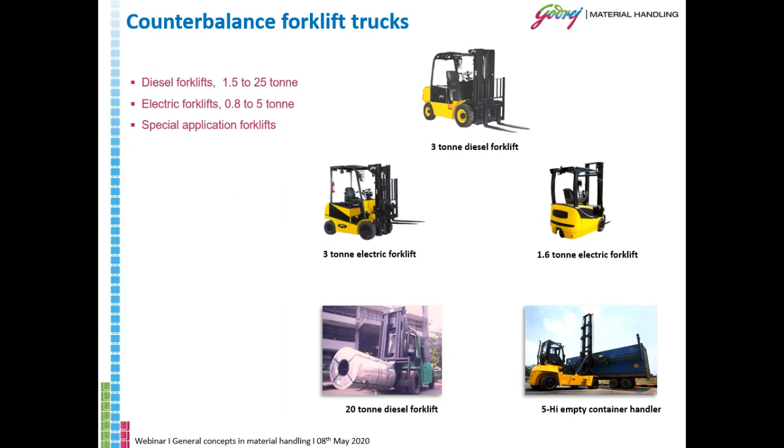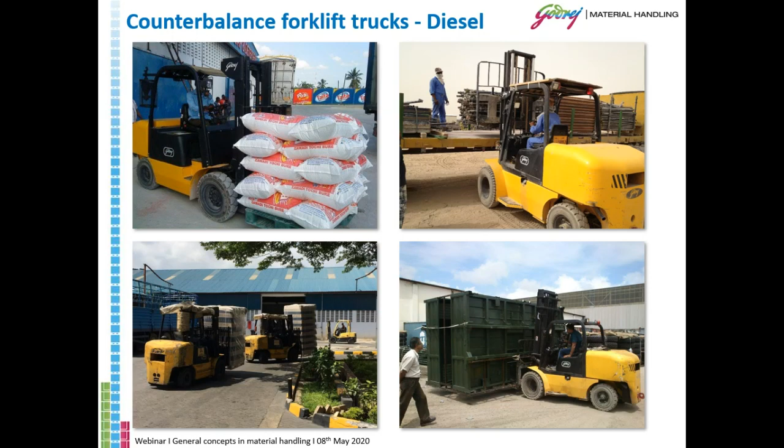So let me just explain in very brief words where exactly a diesel forklift is used. Generally, whenever the application is outside, or it's a bit of a rough environment, it's moving on roads outside the plant, heavy material, rough handling - that is where diesel forklifts are used. So in general, by the nature of the photographs and pictures that you're seeing, you may be able to get an idea of the various applications where this equipment can be put to use.

The next category of equipment is electric forklifts. This is one category which is gaining prominence by the day because there are no emissions in electric forklifts, and it runs with much lesser sound, much quieter. As far as ruggedness is concerned, it is as rugged as a diesel forklift up to a certain tonnage. For example, the general tonnage that an electric forklift can carry is 3 tons, though up to 5 ton electric forklifts are now available in the market.

However, if you need to go higher, for example 8 ton, 10 ton, 12 and 16 ton forklifts, you need to definitely go in for a diesel counterbalance forklift.

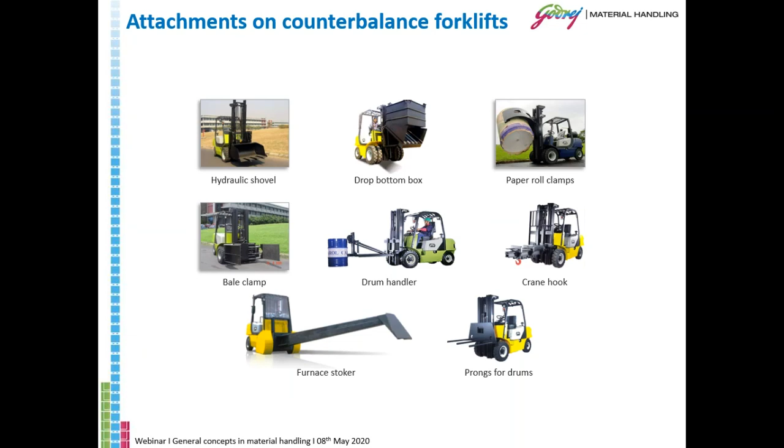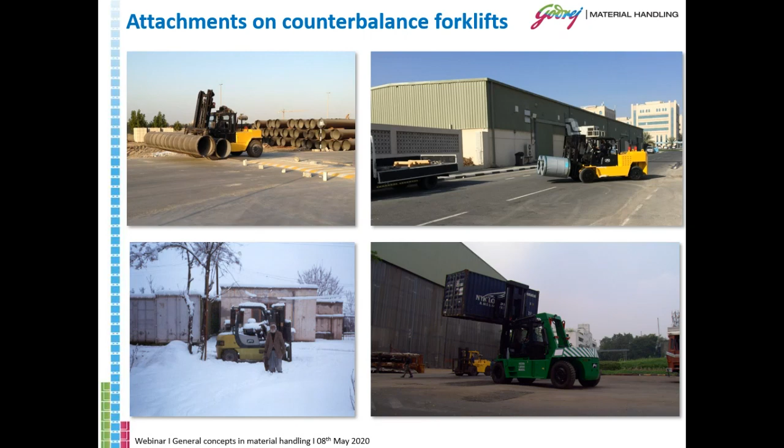I move on to showcase certain attachments in use. As you can see, there are applications such as long pipe handling or empty container handling. Such attachments really help in making the work easy and eliminating the usage of unconventional equipment or unconventional methods. This way you are able to handle your products in a very safe and efficient manner.

Now moving on to warehouse trucks. By the name of it, you can judge that these are basically equipment which are used inside the warehouse or inside the plant.

The main reason for having this category of products is that forklifts, in spite of being a highly rugged equipment, occupy a lot of space and are also constrained by the lift heights that can be accessed using a forklift truck. So to address those two constraints, a separate line of equipment has been developed in the industry, known as warehouse trucks, which ranges right from a very basic manually driven hand pallet truck going up to very high-end man-up machines also.

If you look at the pictures alongside, you will note that we have a hand pallet truck, a powered pallet truck, a stacker, a reach truck, an articulated forklift, a tow truck, and a platform truck.

Just to very quickly explain, a hand pallet truck and powered pallet truck are for ground movement of pallets from one location to another, while the reach truck, stacker, and articulated are for lifting the pallets to a certain height and stacking or destacking from a racking system. To give you an idea, a stacker can go up to say 6.3 meters, a reach truck up to say 12 meters, and an articulated up to say 12.5 meters. So the basic function of this equipment is to maximize the utilization of space in any warehouse.

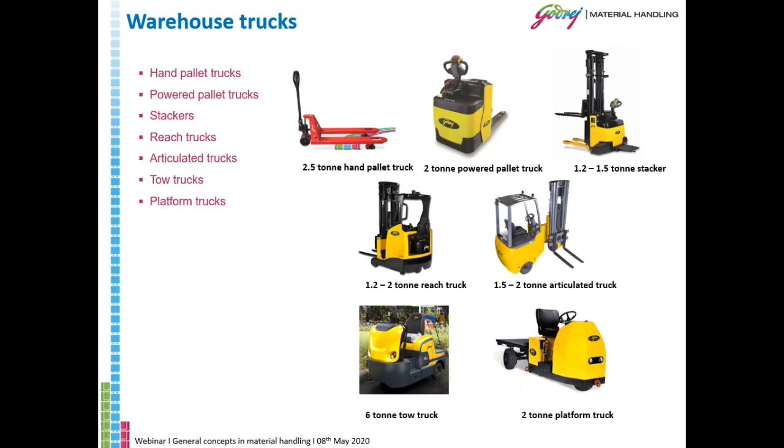As far as tow trucks are concerned, if you would have noticed, especially in an automobile industry, there are a lot of trolleys which are tugged along from one shop to another shop. That is the application where a tow truck comes in very handy. As far as the platform truck is concerned, these are equipment generally used in railway workshops for carrying non-homogeneous material like castings, or for that matter tires or small parts from one point to another. So this, in short, is the category of warehouse trucks.

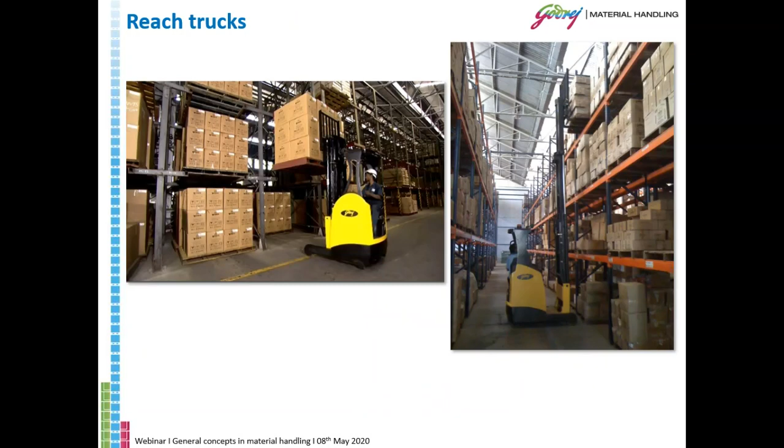Just to show some products in application, this is a reach truck in application in a racking system, and similarly, an articulated forklift being shown in application in a racking system.

Now the next section we are talking about is what are the typical material handling applications in a warehouse. So far what we have covered, I have tried to give you an exposure on the various types of material handling equipment available in the industry. Now what I'm going to talk about is what applications are generally there where this equipment is used, and how you really broadly select that equipment. Though there may be many parameters, if you start using these as thumb rules, at least there will be a good beginning as far as selection of material handling equipment is concerned.

This is a typical layout of a warehouse, where we have tried to show the various applications that are likely to happen in any typical warehouse or storage area.

You have applications like dock operations and transportation. Dock operations means you have a container docked near your inwards gate, which you either empty or stuff depending on incoming or outgoing material. Then there is the staging area, where you de-stuff the container and park it till it's taken to the final storage location. For that you need transportation equipment, and also for taking pallets from the staging area to the racking area.

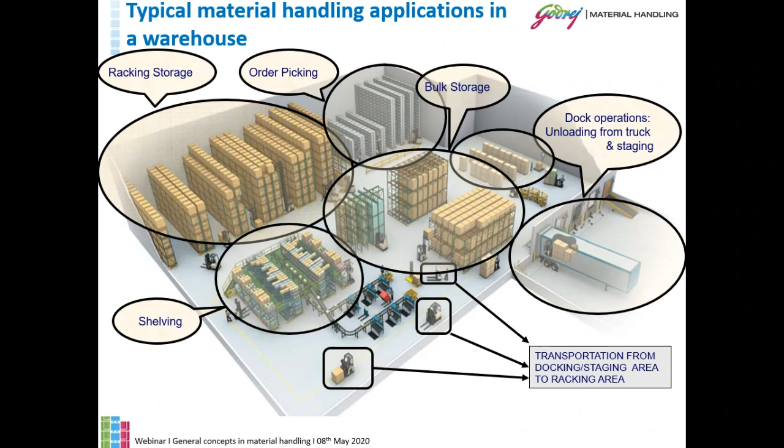Then there is bulk storage, where you either keep items in a staging area, or the items are self-stacking, stacked one over the other. That's how you maximize the utilization of your space without investing in a racking system, because these are self-stackable. That is the next type of storage.

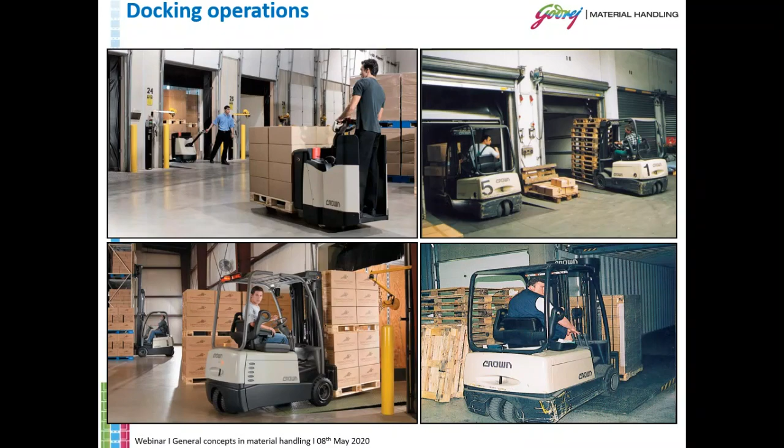Now let us talk about the dock operations first. These pictures typically show the docking operations. On the top left corner, there is a container parked and a person using a powered pallet truck to de-stuff a container, while another person is bringing a powered pallet truck near the container to stuff it. Similarly, forklifts are also used for the same application of container stuffing and de-stuffing. So whenever you have an application that needs docking operations, these are the equipment you can consider.

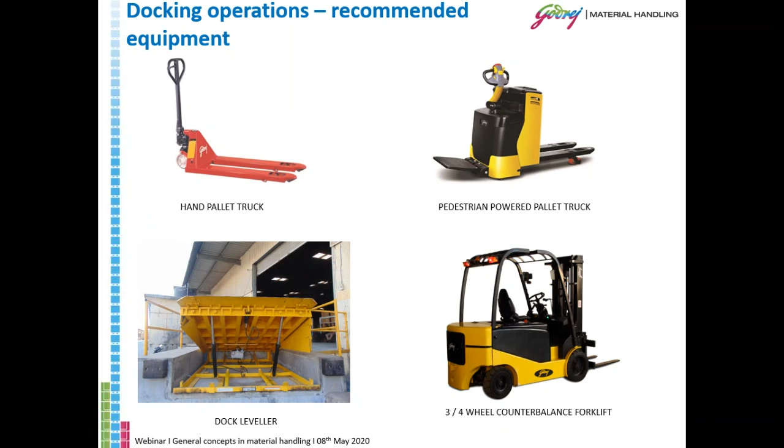I have showcased 4 products: the hand pallet truck, powered pallet truck, and the dock leveler. This is a very important element of any docking operation, because it bridges the gap between the ramp and the truck body, so that a forklift or powered pallet truck can safely and seamlessly transfer material between the truck and the warehouse or the plant, whatever the case may be.

Next, we are talking about the transportation of items from the docking or staging area to the racking area. So when we talk about docking operations, it is not only about keeping the products out from the container, but also storing it in the staging area.

In transportation, because you have to clear off that area fast depending on the throughput and speed of operation needed, there are different types of equipment used. People try to take 2 pallets at a time, or use BOPTs with long forks where they can handle 2 pallets at a time. Such equipment is used because the basic purpose is to clear the staging area fast, so instead of handling 1 pallet, people use 2 pallets to clear the staging area in half the time.

This slide talks about the various products used in the industry for transportation: powered pallet trucks, double pallet stackers, low level order picker, pedestrian rider stacker, forklift, and tow tractor. Many times there are applications where customers keep a cage trolley ready at the staging area, where all the discrete items are put, and then these trolleys are towed away to the final location using a tow truck.

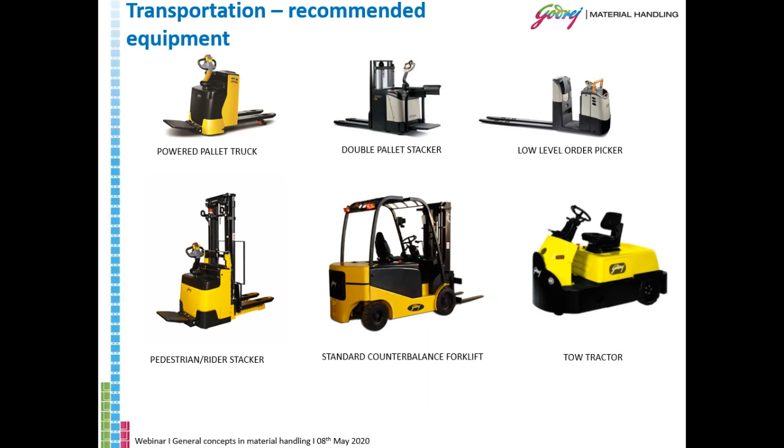So next, as I go into each of these products, there will be some finer points I'll talk about, which may be an existing doubt for many participants of this webinar. One aspect people may not be clear about: can we use a powered pallet truck for closed pallet handling? The answer is yes.

But the main point is you have to be careful about the dimensions, as I've shown here. The plank thickness and the distance between the two runners are very important to know whether a BOPT will be able to handle that closed pallet or not. The wheels have to not only cross the plank, but when we raise the forks and the wheels come down, they should not rest on another runner, which may break the pallet. So we need to be vigilant about the various dimensions.

So if you have closed pallets in your facility and you are intending to use the BOPT, I would recommend that these aspects are considered before putting the truck into operation.

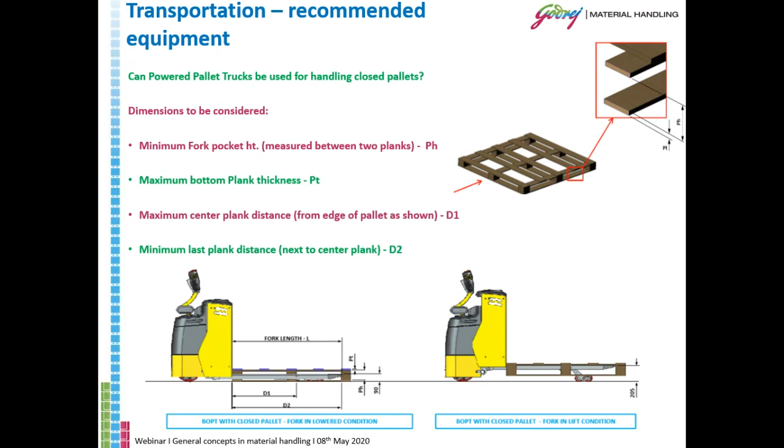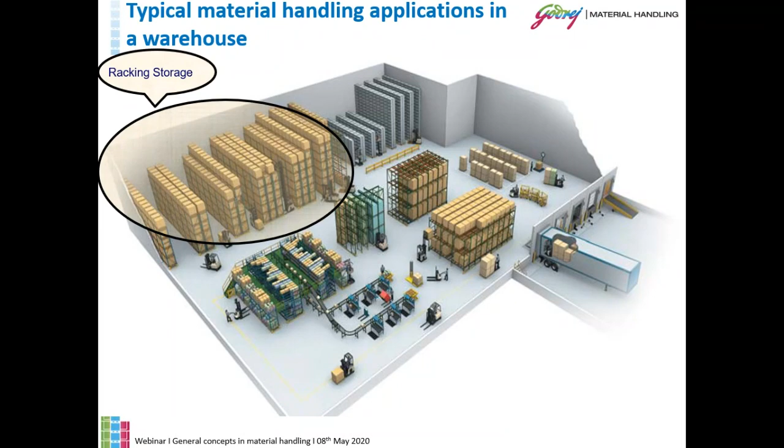Now we will talk about the next part, which is racking storage. In racking storage, there are multiple types of equipment used, and there are many finer points we need to be careful about. I'd like to spend some time on this because it's the most common aspect in material handling and storage.

First, let me show you the various types of racking storage. The first is single deep racking, also known as selective pallet racking system. Here we need to take care of the working aisle space and the loading level required. There are many parameters to consider before designing a racking system or ensuring compatibility between the MHE and the racking system.

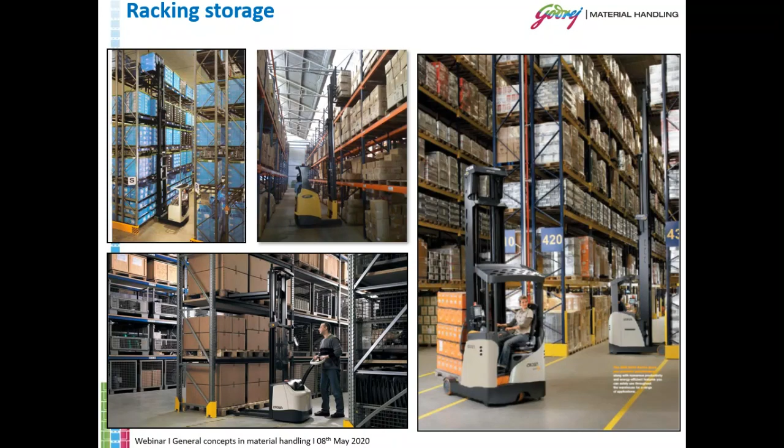Too tight an aisle may slow down the operation; too wide an aisle may waste your space. So there has to be an ideal mix that gives the most optimum solution. This is just a thumb rule we can consider in the industry.

Racking storages and compatible equipment are also defined based on the aisles in which they operate. Starting from below, a counterbalance forklift takes about 3.5 meters or more as aisle space.

If we go to the next step, narrow aisle trucks, such as reach trucks, operate in 2.7 to 3 meters. Then there are other pedestrian equipment such as stackers, which also operate in narrow aisles of 2.4 to 2.8 meters.

And last but not least, we have very narrow aisle man-up machines, such as turret stock pickers and articulated forklifts, which can work in aisles as narrow as 1.5 to 2 meters.

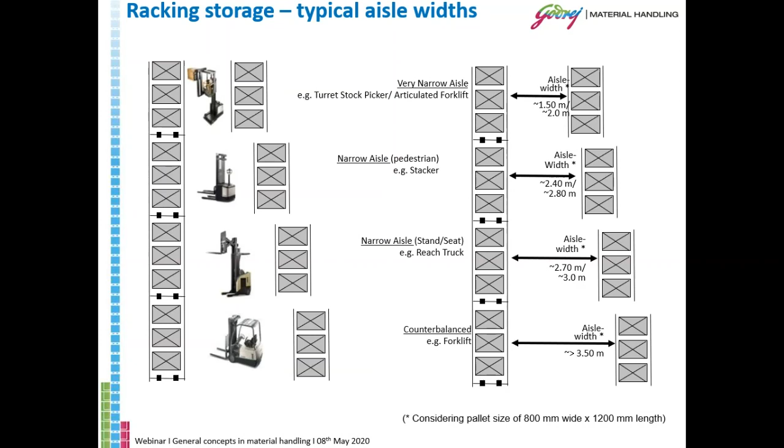But every application has a uniqueness associated with it, so there is no one size that fits all. We have to be very careful in making a selection. In some cases a very narrow aisle solution may work, but in others a reach truck may be the right solution. This is just to give a thumb rule for how different aisle spaces and related equipment are selected.

Taking this further, if we assume a standard racking, layout, and elevation on a particular floor plan, and suppose base level storage with a counterbalance stacker or truck is about 4,500 pallets, then taking that as a base, a reach truck will store about 8,000 pallets, which is almost 70-75% more. And if we take a man-up machine, considering a lift height of up to say 17 meters, it can go up to 15,000 pallets. So that's the storage capacity you can arrive at depending on the combination of equipment and racking you choose.

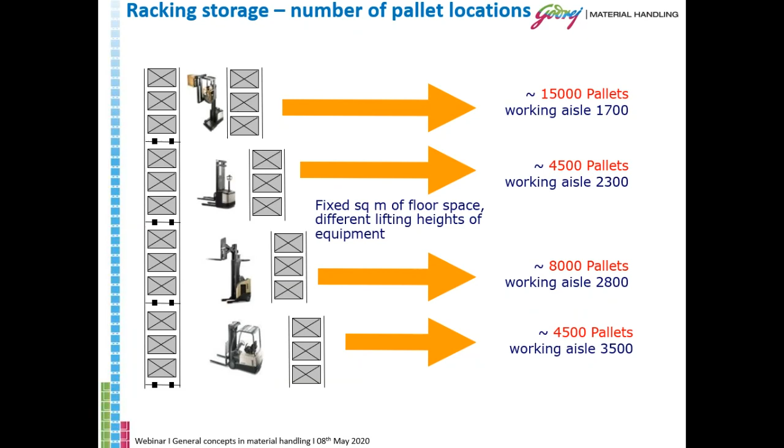Now, in racking storage, there are various types of equipment. As I said, it totally depends on application, and a very important part of that is what is the load that we are carrying, and what are the dimensions of the pallet on which that load is placed?

Because it is all a function of how the load is being handled with what load center. It is simple physics, simple mechanics, whereby it will either be balanced by a counterbalance, or if you look at warehouse trucks, it will be balanced by the footprint of the equipment. So if we have too wide or too long a pallet, we may have to select a suitable equipment, even if it isn't going very high, just to handle that wider configuration because the load center would have shifted.

These are things we have to be very careful about before we look at a catalog and just say, okay, I need a 1.5 ton or 2 ton forklift because my pallet is just 2 ton. We cannot look at the load in isolation. We also have to look at the size which is going to be handled. That's a very important criteria for selecting equipment.

So these are the various equipment visible in front of you: stacker, reach truck, single deep and double deep reach truck, articulated forklift, man-up machine, and a stand-up counterbalance forklift is also available in the industry for people to use.

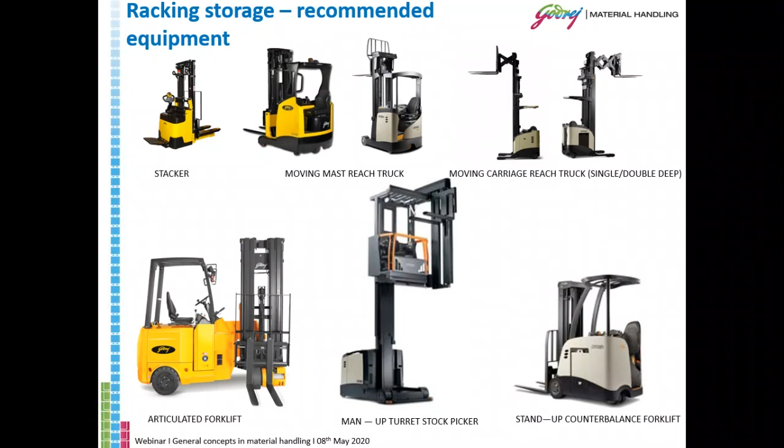Though people also use telescopic forks on moving mast reach trucks, that is an attachment and not an integral part of the equipment, like it is in a double deep reach truck, where the double pantograph is an integral part of the equipment.

So these are the various parameters that we need to be vigilant about before we select the right material handling equipment.

For example, as I mentioned, the type of pallet. When I say type of pallet, it is also a function of whether it is an open type pallet or closed type pallet, and it is more relevant for stackers, as you will see in subsequent slides.

Next is aisle space. What is the available aisle space that I have, or depending on the equipment that has been selected, a suitable aisle space has to be kept.

Because it is important—if we keep too tight an aisle space in the interest of storing more, somewhere or the other we will be compromising the throughput, because the trucks will run slower, or there can be instances of unsafe operations, where trucks may brush against the racking system and it may lead to an incident.

Next is maximum fork height. Again, depending on what your last loading level is, we typically add 200 mm to that to arrive at the most optimum maximum fork height, and then we select whatever is in the range.

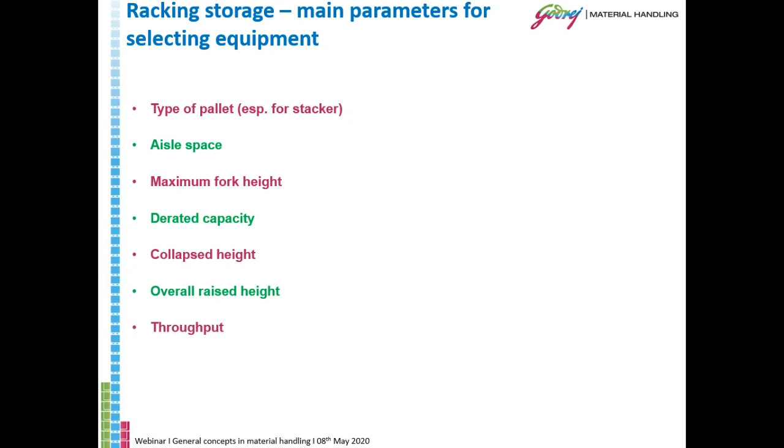But you will go back and see how many pallets do I need to take in, take out, and whether with a pedestrian equipment, where a person is actually walking behind the truck or standing on the platform and moving, I'll be getting the throughput, or I should rather go in for one reach truck rather than 4 stackers. Suddenly the techno-commercial reasoning will change when throughput comes into picture. So that is what I intended to mention, that every parameter is important and nothing can be seen in isolation.

So this is a typical layout. Don't worry if the numbers are not visible, I just wanted to showcase. I hope the cursor is visible to all. So this is the top view of a racking layout. The space in between is the aisle space that I was talking about. This is the space where the equipment will be predominantly working, so we should have enough space for the equipment to operate.

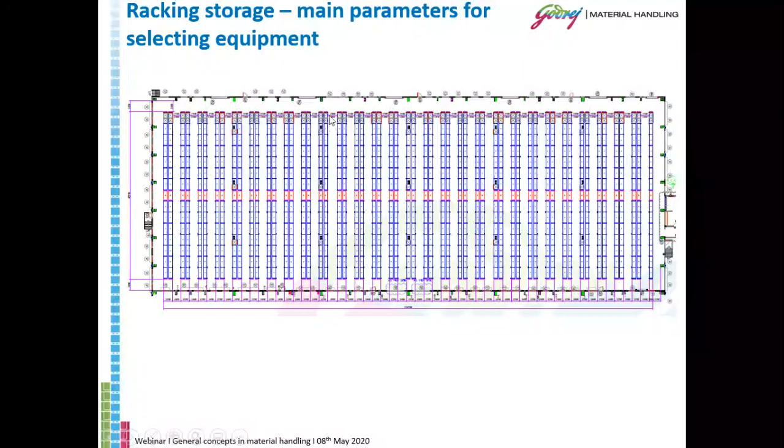Now next, if we look at the other aspects of selecting an equipment, so as we said that one of the popular equipment is stacker. So 2 stackers, I hope they are visible to all. Left hand side is the fork over stacker and the right hand side is the wide straddle stacker.

Now here comes the important part. The left hand stacker cannot be used for a closed type pallet. Okay, so it has happened so many times in the industry that we have come across situations where people were not aware of this aspect, leading to a wrong decision and leading to some sort of hardships in terms of exchanging of equipment or slowdown in operations or operations getting hampered because of this. So this is an important parameter that we need to look at.

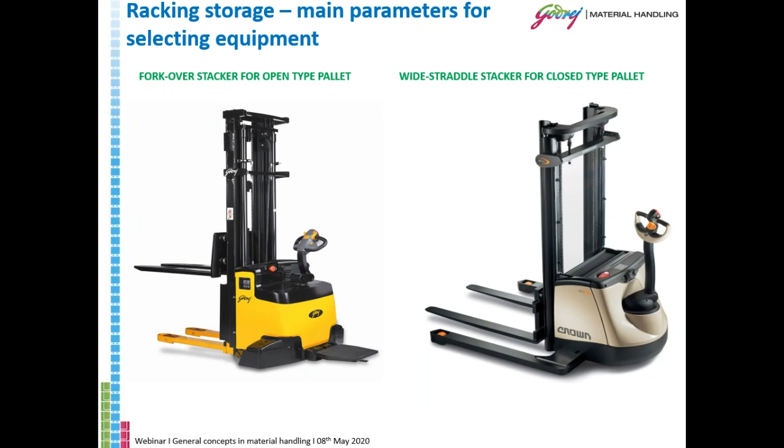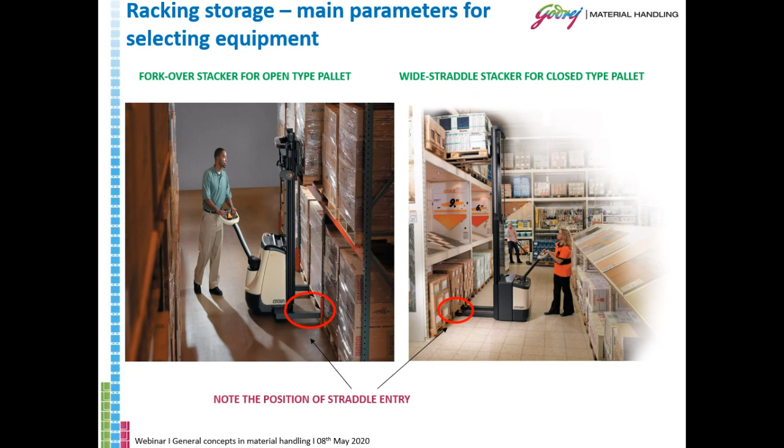So if you notice in this image, on the fork over stacker, the straddles are going inside the pallet while the forks are up keeping the pallet. I'm talking about the left hand side. Okay, whereas on the right hand side it's a wide straddle which is going alongside the pallet. So you can notice the position of the straddle in both these cases.

Now if you notice, if we take a closed pallet for a fork over stacker, this is what is likely to happen. It will not go, and you cannot perform that application with a fork over stacker if your application has closed pallets.

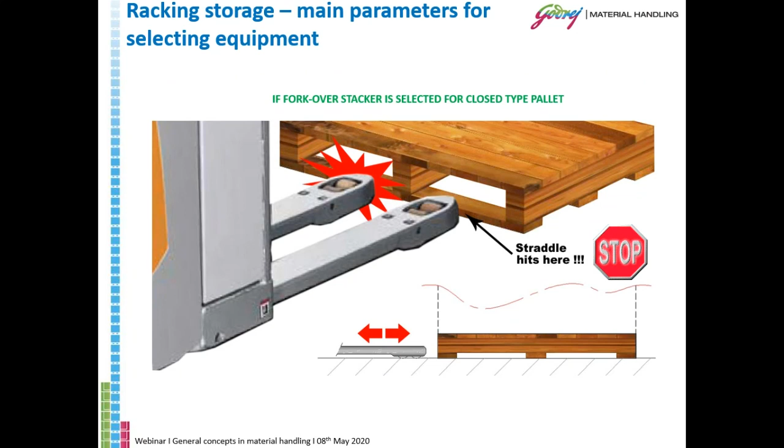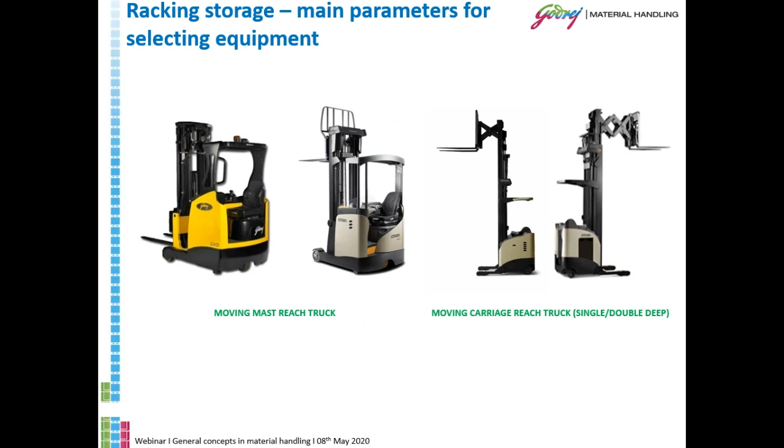Now, next we talk about reach trucks. Again, in reach trucks, as I explained, there is a moving mast reach truck and then there is a moving carriage reach truck, which is used for single or double deep application. Okay. Now, I would just highlight certain critical points which are important in selecting or keeping in mind when a reach truck is being selected for an application.

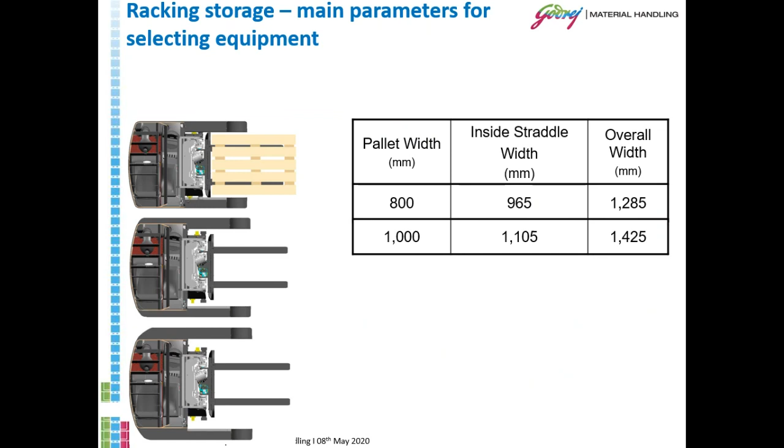The first is there are different straddle dimensions which are available for pallet widths depending on how the truck is configured. Okay, so with different pallet widths, you have different straddle dimensions. But what happens if your pallet width is wider than the straddle width? Now, there's another point that you have to notice. If you notice in the table, the 1200 width pallet, if we use the widest truck, it is having the highest width. Okay, whereas the first truck which is handling a 1200 wide 800 wide pallet, which is having the lowest width.

Now we may take a choice that even though my pallet is 1200 wide, I may still select a 1285 width reach truck. Okay, why? Because if you want to have an aisle space where you want two reach trucks to cross each other while they are moving from one point to another, a 1575 may make it a bit of a struggle, or you may want to keep a very wide aisle space for that. Okay, but if you are not able to accommodate the pallet between the straddles, then you need to take care of one more aspect, which is in the next slide.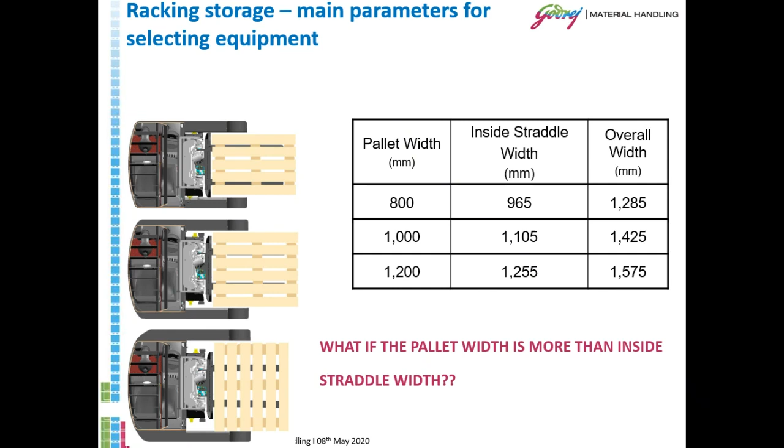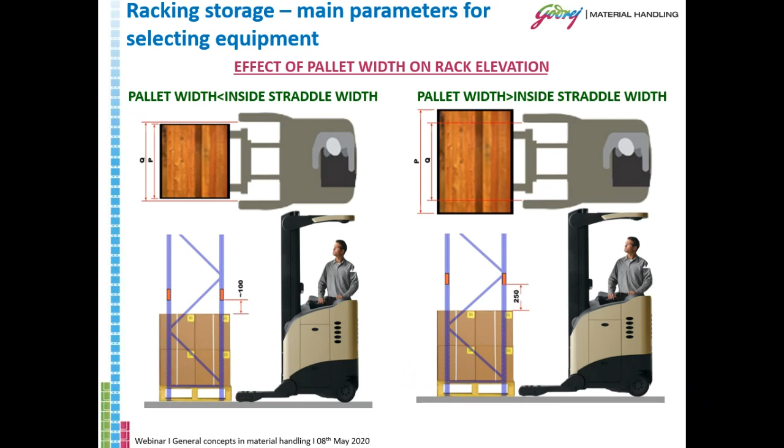Okay, now if you see, your conventional distance between the top of the pallet and the bottom of the beam in any racking system is say 100, which is enough for the pallet to be taken off and taken away. But if the pallet is not getting accommodated between the straddles, that means it is over the outriggers, you need to take care of the height of that outrigger to keep that additional space. Now these numbers are just for representation purpose. They will change based on the equipment in consideration. Okay, but the point that I'm trying to make here is that you need to be vigilant about this part.

Next, we are talking about a double deep racking, which is a very popular way of storage, especially in cold storages where we are trying to maximize cubic space utilization. Here, it is very important that we make the right choices in terms of racking design so that the truck and racking are easily able to work with each other with absolute compatibility.

Now, if you notice in single deep racking, the mast remains outside or the outriggers remain outside the racking system, whereas in double deep racking they move below the bottom beam. Okay, or they move inside the racking system. So what does it mean? That for double deep racking it is recommended that you keep a bottom beam, because if you don't keep a bottom beam, either you may have to have a very wide span or you may not be able to operate the truck in that environment.

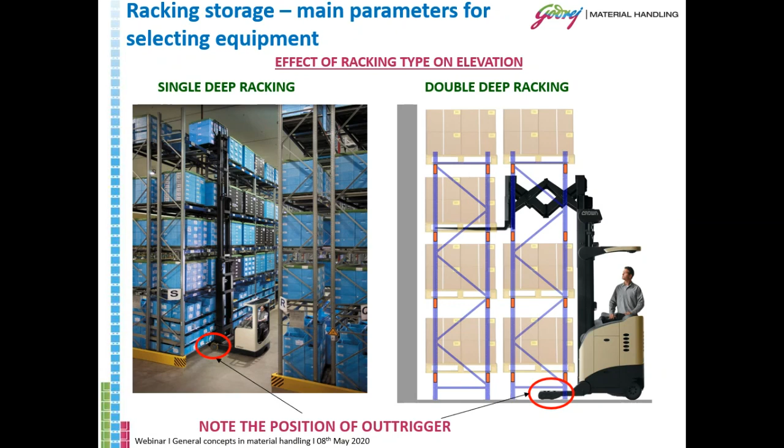Okay. The second important aspect, because the straddles are going inside the racking system in a way, to be able to place the second deep pallet, so your beam span is going to be different. Now this is one of the most important points that many times gets missed out at the planning stage, leading to some issues in terms of operations.

So if, for example, we are keeping two pallets on a level, generally the beam span on which these pallets are placed will be 2700 wide. So how is that calculated? 1200 plus 1200 and 100 space on each side. So that is 2700. Okay.

However, because now we have to accommodate the outrigger, a calculation has to be made which takes care of these outriggers also being required to go inside the racking system. So you may require, instead of 2700 mm, maybe 2850 or 2900 mm. Okay, so that is what we need to be very vigilant about, because if we go with a conventional beam span and go for a double deep reach truck, it may certainly create some issues at the time of implementation.

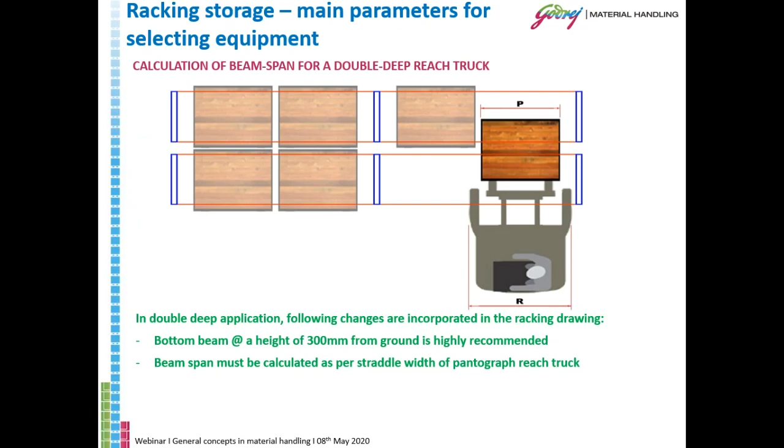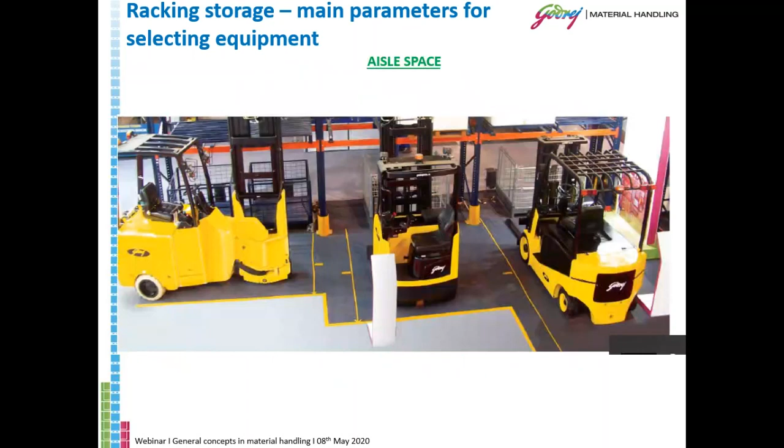As I said, aisle space is a very important consideration. This picture speaks for itself. For example, a counterbalance forklift will require a very wide space, a reach truck will require relatively less space, and as I mentioned in my earlier slide, VNA equipment like an articulated forklift will require much lesser space, the lowest aisle space in the industry. Okay, so if aisle space is one of the considerations and we want to maximize the storage, this is one of the equipment that may be considered.

But one important point here is there is something called end aisle space. End aisle space means the aisle where the aisle is ending. It's a dead end. At that point, not for any other equipment, but for an articulated forklift, you need to keep a minimum space of 750 to 850 mm, so that the last pallets can be placed, because that is how this truck operates in an aisle. The truck is not moving, it is only the mast which is articulating along an axis and keeping the pallet. So for it to articulate around its actual axis, it needs that additional space, which is important to be kept at the end of the aisle.

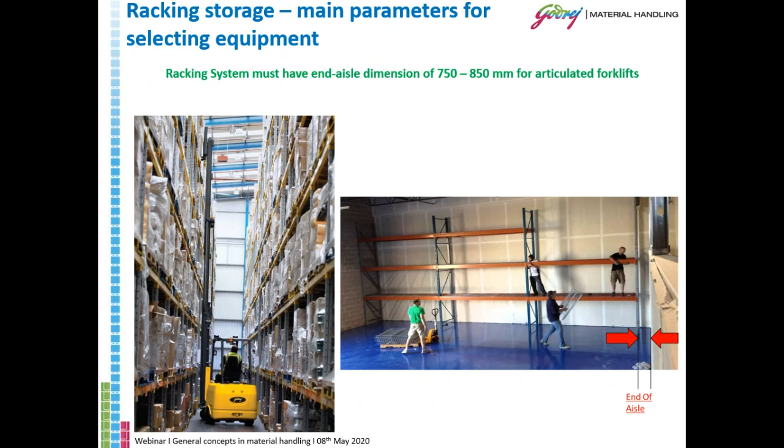Next type of racking system that is popular is the drive-in racking system, where the equipment generally goes inside the racking system to do the stacking and destacking. Now, what is important when

Hello? Am I audible? Hello? Yes, audible. Yeah, you're audible now. Okay. Thank you. So is the screen visible? Sorry. Yeah. So I hope the screen is visible. I just had a connectivity issue. I'm sorry about that.

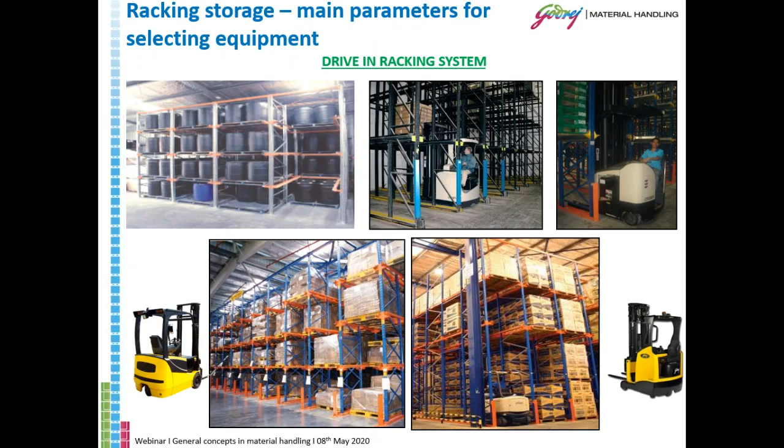So drive-in racking system is another popular racking system, as I mentioned, but the important aspects to be considered in this type of racking system are: the width of the equipment should be able to get accommodated in the system, because the truck is getting inside the drive-in racking system. And second, the first level should be such that it doesn't become an obstruction for the overhead guard height or the structure of the machine. I'll just show it in the next slide.

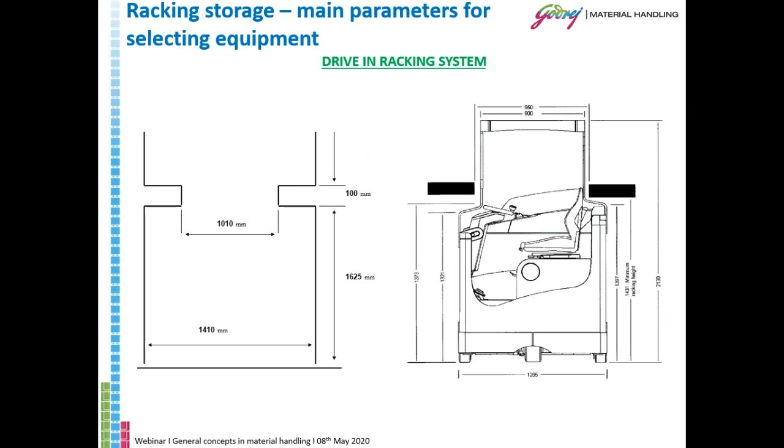So this is a typical elevation of a drive-in racking system on the left-hand side. You have the cantilever on which the pallets are placed, and on the right-hand side is a truck where you see there is a slight modification which has been done on the reach truck, so that it is able to squeeze through the space between the two cantilevers on which the pallets are placed. Okay.

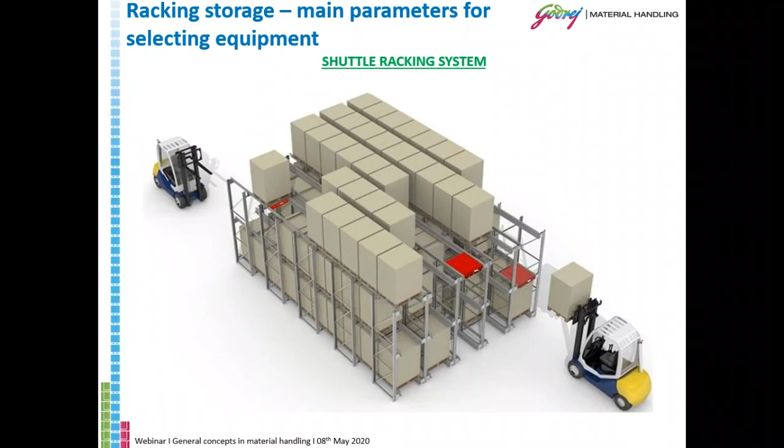So the next racking system which is getting very popular now is the shuttle racking system. Here, instead of the truck going in, it is the shuttle which is taking the pallet inside. Those red colored objects that you're seeing on the screen are the shuttles on which the pallets are placed, and these red colored shuttles are remote control operated, and they run on powered motors on batteries, and they take the pallet and place it behind and come back to pick up the next pallet. Okay, so this is a system which is also getting very popular in dense storage. So a few pictures where you can see the actual image of a radio shuttle.

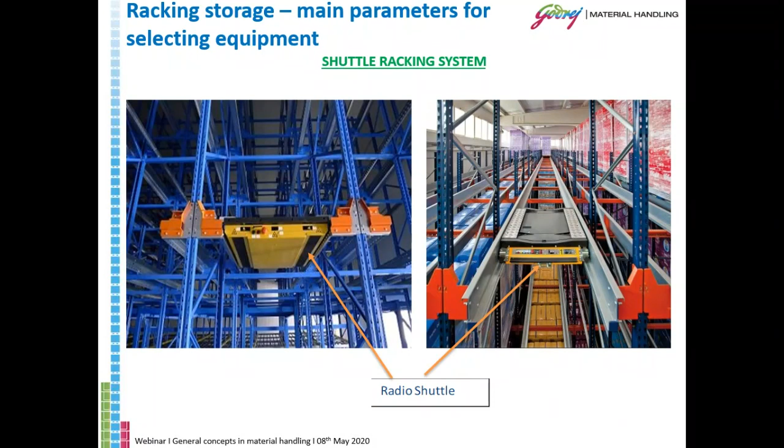Which carries the pallet from the beginning of the row to the end of the row. Now, one of the most important aspects is that because the shuttle is slightly inside and there is also a barrier in front of the racking system, you will not be able to place the pallet exactly till the edge unless you do something called tip loading.

Many times this very small aspect gets missed out, leading to pallets not being able to be placed on the shuttle, and the whole system comes to a standstill till the solution is defined. And the other pitfall is, if we do not define this upfront, there is a change in load center also.

You may have to change the equipment from say 1.6 ton to 2 ton, in case your load capacity requirements at a height of say 7 or 8 meters are not able to be met with the extended load center using a lower tonnage reach truck. So that is the criticality of this particular aspect.

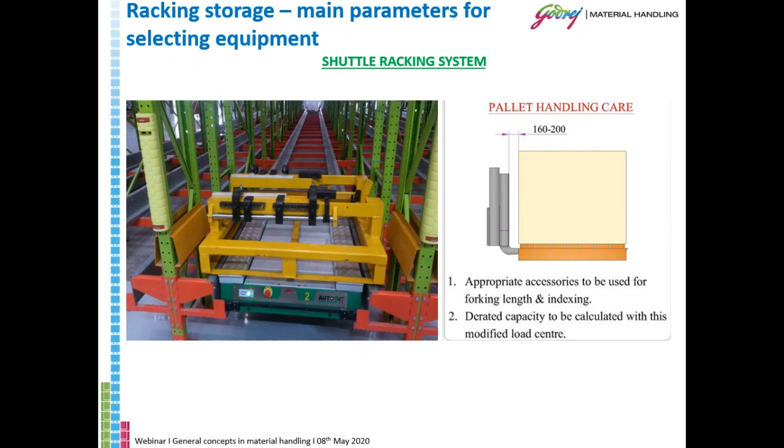As I mentioned in the beginning of the presentation, these are very small, basic things, but we understand many times these get skipped out. That's the reason we are sharing this basic information, which helps you to plan better, be vigilant, and have a safe application.

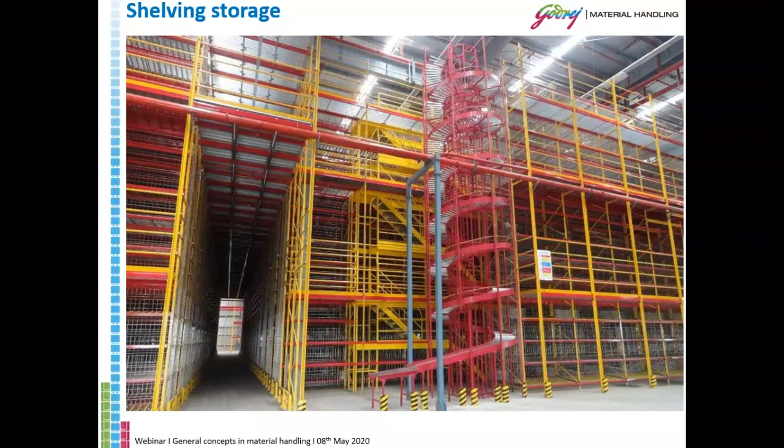So next we are talking about a shelving system. In a shelving system, there is generally no material handling equipment used. But again, you have to be careful that if we are using items like staircases and so on, it should be something mobile with good stability so there are no issues.

One of the products that are used is something called a work assist vehicle, which is just a concept.

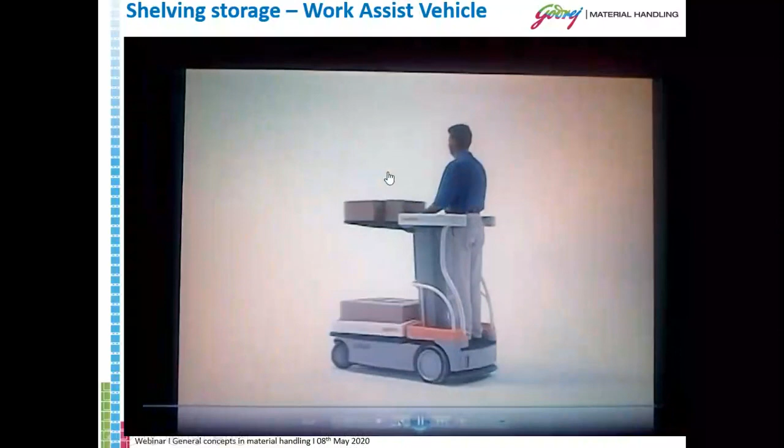So I hope that cleared the concept of safe handling even in shelving systems. Now next we are talking about order picking.

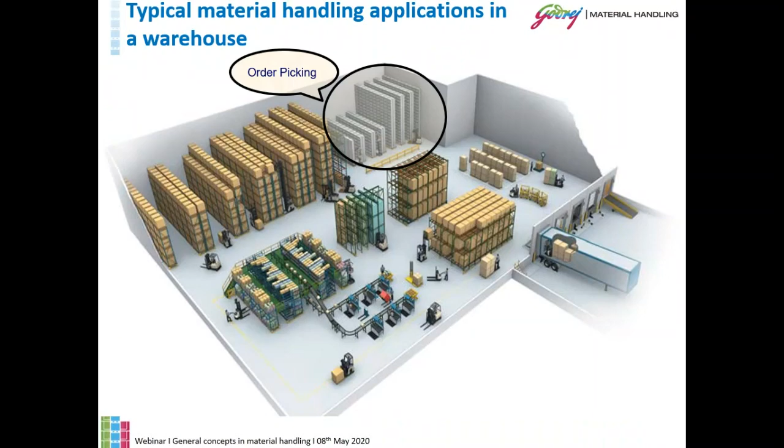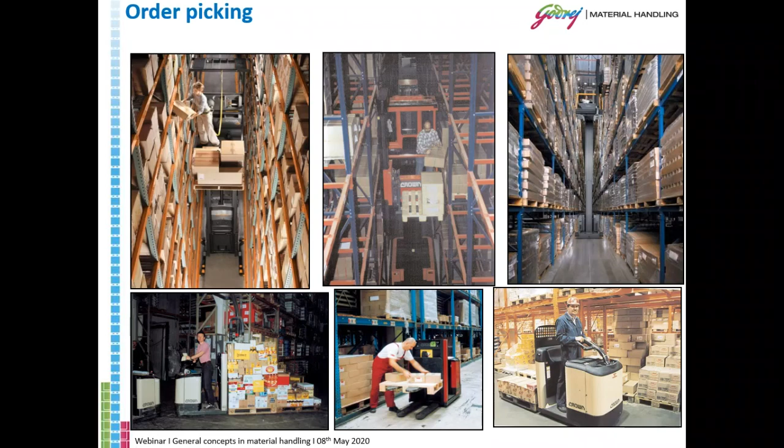This is a very important application where sometimes very basic aspects are not kept in consideration, because order picking is an application where there is specific equipment available in the industry for doing a typical order picking.

So what happens is, if we use a product like a reach truck to do order picking, either we'll be doing unsafe operations in terms of taking the person up on a cage or something which is really unsafe, or it will be an unproductive sort of application wherein we try to bring the full pallet down, do the order picking, and then put the pallet back.

So the entire throughput will really get compromised if we do not use the right equipment. These are the various applications of order picking.

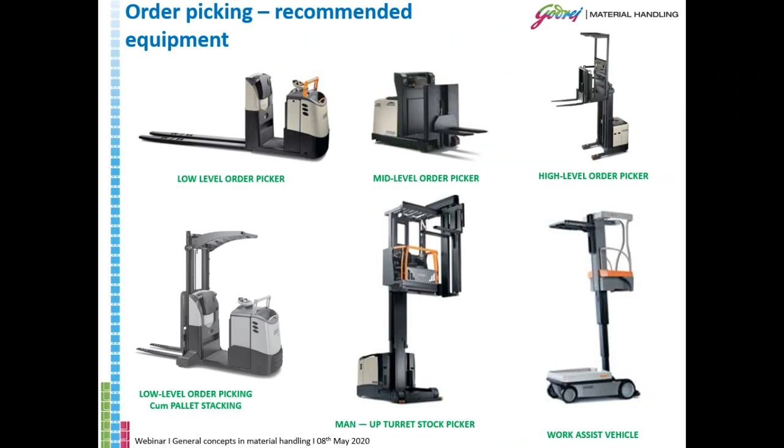Another debate which keeps happening across the industry is whether a powered pallet truck can be used as an order picker. In some cases it may work out, but really in high throughput applications, we may look at something like a low level order picker, which is the right equipment for low level order picking.

When I say low level order picking, it is picking from the ground and ground plus one level. So these are the various categories available in this category of application, which is order picking.

So I'm just moving on. This is the first one, the low level order picker. I'll just quickly run a video for all of you to understand why this is a typical order picking setup.

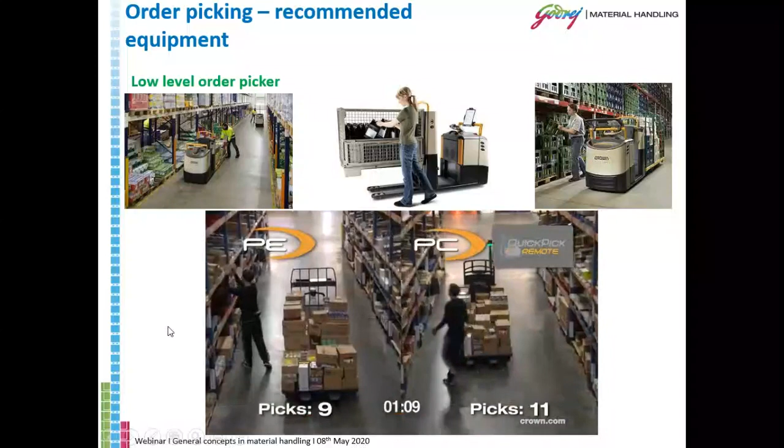So in the interest of time, basically in that video what we wanted to showcase was that order picking is a specific application where the person is generally walking alongside the equipment, rather than like a BOPT where the full pallet is taken from one point to another. It's all about efficiency in that operation.

Every second or every minute saved in every trip adds up at the end of each duty cycle, and it keeps adding on till the end of the month, year, and it finally turns out to be a big saver if we go for the right equipment.

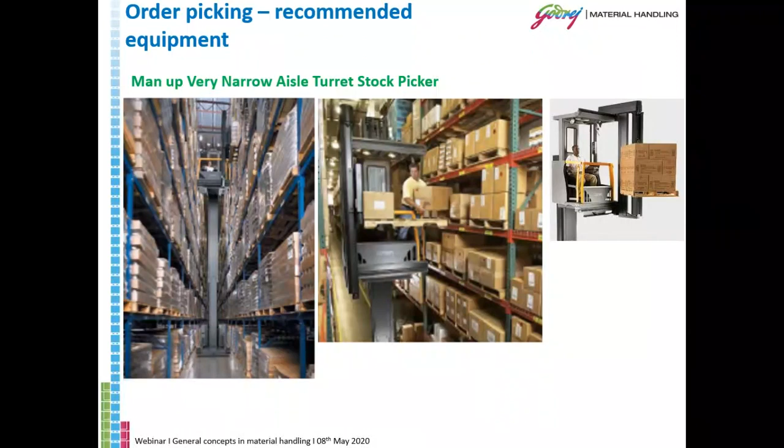The next is the man up turret stock picker, where, as you can see, a man is near the pallet to pick up the goods, and this can also handle full pallets.

So these are the various types of order pickers which are available in the industry, depending on the size of the equipment, the need of the application, and the different SKUs used in any industry.

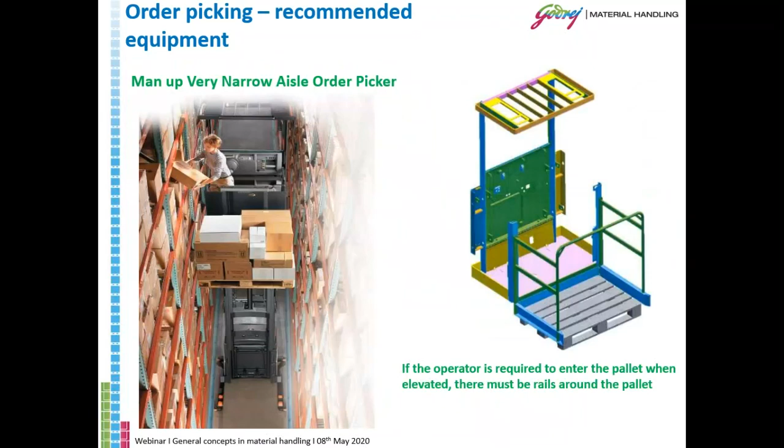So again, a very basic thing, if the order picking requires a person to move onto the pallet to be nearer to the stacking point, there has to be a cage around the pallet for safety purposes, along with a lanyard, operator lanyard.

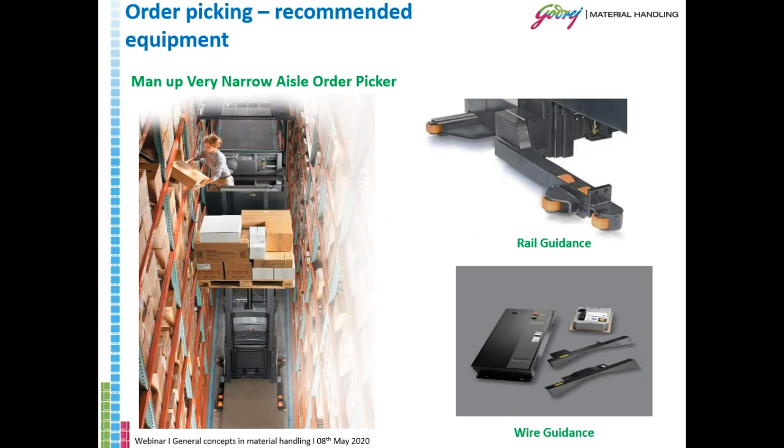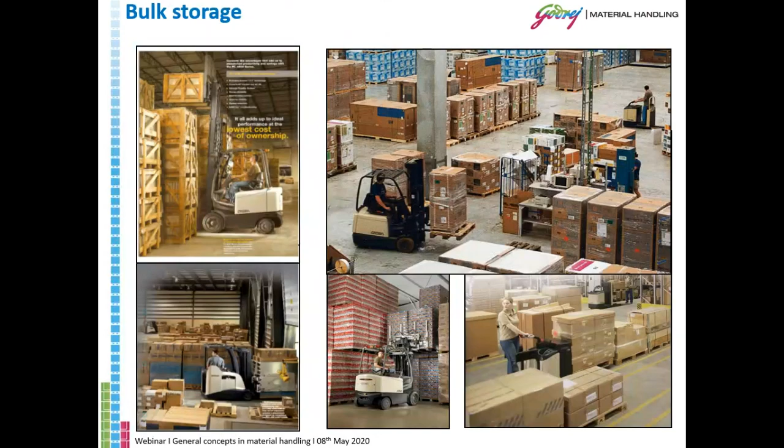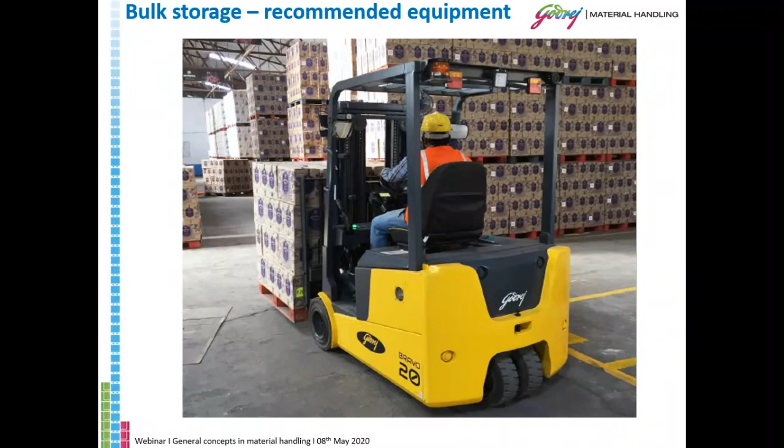So the next is bulk storage, where self-stacking items are kept one over the other, and we use different types of equipment to do this. One of the most popular equipment is the electric forklift, three-wheeler electric forklift, because it occupies less space. So generally people go in for this equipment. And there are other equipment which are used in bulk storage as well.

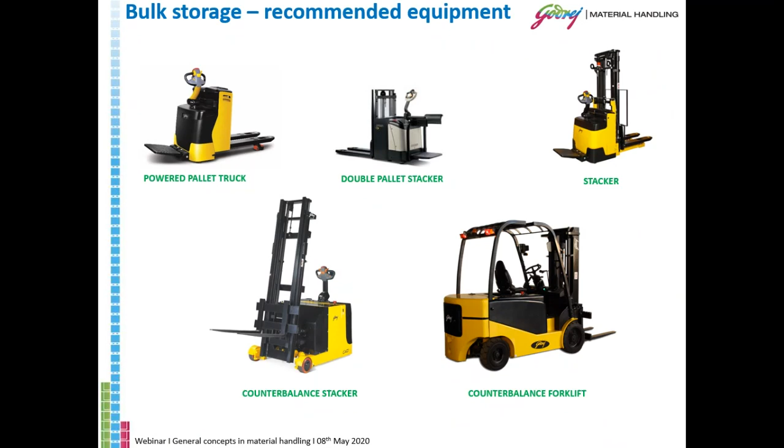The last topic before we end my session and go on to questions is about flooring. I have not mentioned any comments here because this is a very wide topic, and we as part of the material handling industry are no subject matter experts in flooring.

But of course, I must say that this is a very important parameter in ensuring the longevity of equipment, because a good floor ensures that your maintenance costs are the lowest and your truck runs longer, safer. There is something called TR34 guidelines, which are internationally recognized guidelines generally used for industrial flooring.

And the second and last topic is, many times people consider epoxy to be a good flooring solution. See, for an item like material handling equipment, which has a self weight of 3 to 7 tons with load and without load, epoxy is not a load carrying member.

So epoxy is generally used where we have stationary equipment, people moving around. That is where epoxy is generally recommended. Places where MHE is moving, epoxy is generally not recommended, and certainly not to fill up gaps.

Because once you fill up the gaps using epoxy, at first look you will think you have made the floor okay. But once the truck starts moving onto it, it will start getting into those crevices. The flooring, the epoxy will start getting peeled off, and then there will be issues about flooring getting damaged over a period of time.

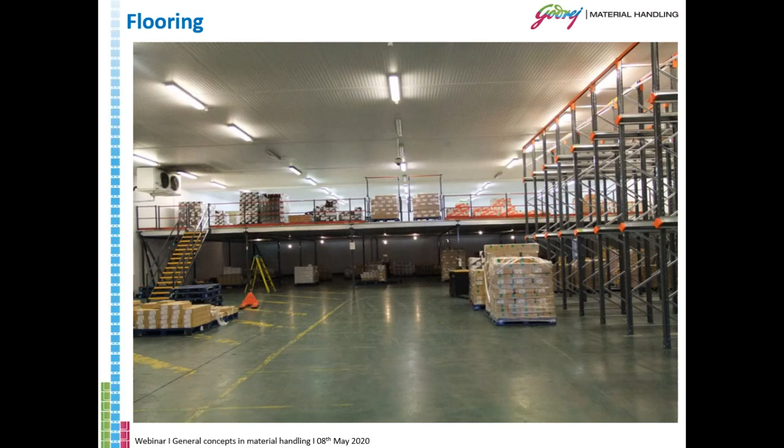Okay, so that is one topic I thought I must talk about. With that, I am at the end of my scheduled time of the presentation. Next, I am ready to take on certain questions if they are there. So let me have a look.

One of the questions which has come in is, can we convert a single deep reach truck into a double deep reach truck? So, technically, if you have an attachment like a telescopic fork attachment on a moving mast reach truck, that reach truck gets converted into a double deep reach truck. But when we talk about a pantograph type of reach truck, that pantograph is an integral part of the design.

So either you have a single deep reach truck right up front, or you go for a double deep reach truck. Technically, it may be possible, but doing it at a field level may be a bit of a challenge. Doing it at a plant or warehouse, not exactly in the OEM's plant, that may be a challenge.